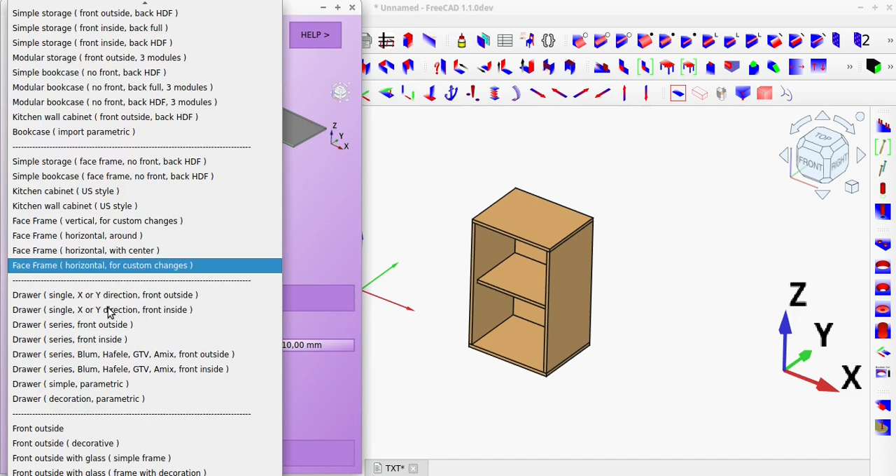Foot can be created via the magicStart tool. To create a foot under an existing piece of furniture, select the bottom surface of the furniture and then press the button to calculate the foot position and size. You can then press the button to create the foot under the furniture.

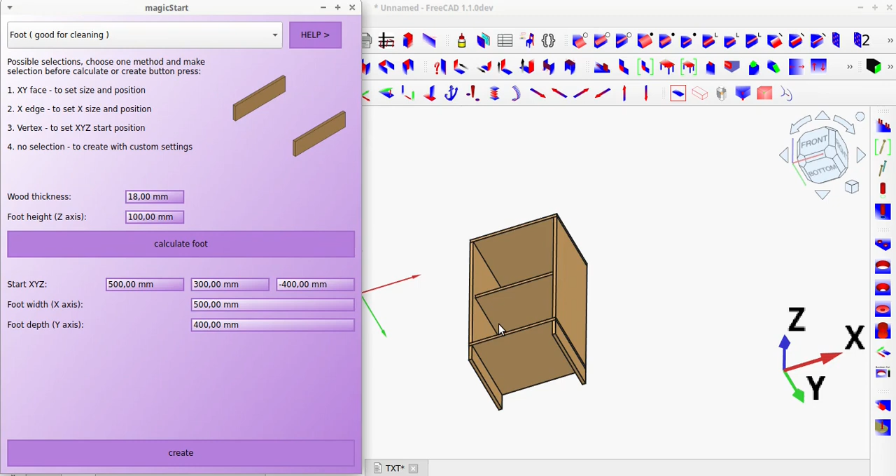You can also create a foot under the furniture by selecting only an edge or vertex, but in these cases, you have to manually fill in the remaining dimensions needed to create the foot. The magicStart tool offers several different foot versions. These versions are designed to be used to create solutions commonly used by carpenters.

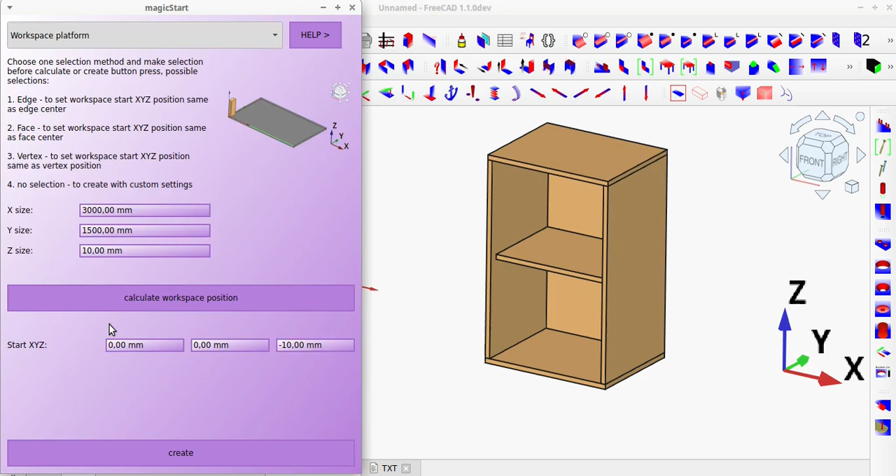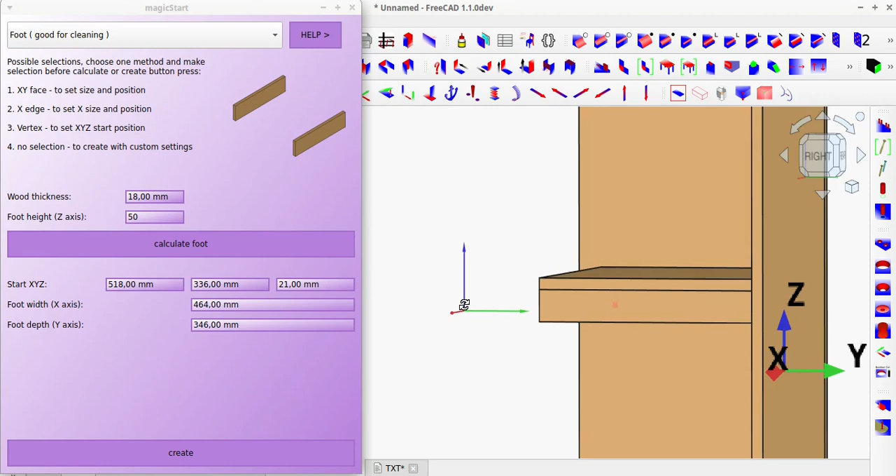The foot can also be used in other, more unconventional ways. For example, you can create supports under the shelf. If you don't want to weaken the side walls of the furniture and create grooves for the shelves, or you don't have a table saw or router to create such grooves, but you want a heavy-duty shelf, this solution may

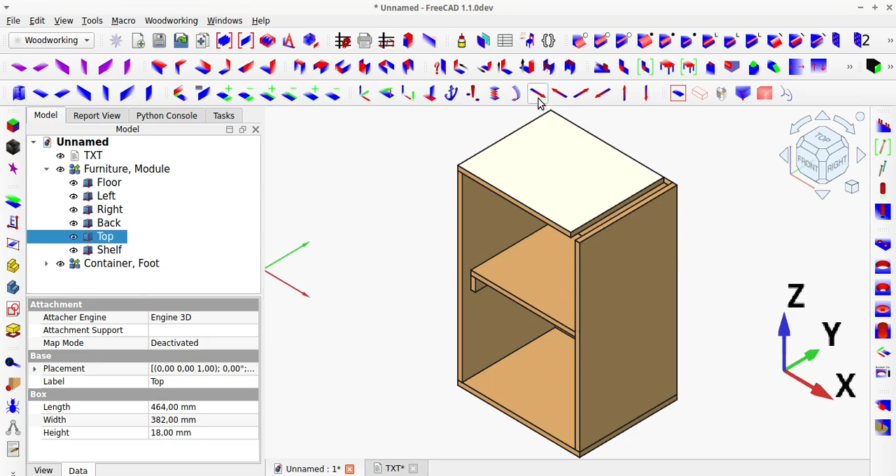be helpful. Aluminum angle brackets can also be used to make the shelf stronger, but you must buy them first, and the shelf will be permanently attached. With such supports, you can use scrap, and the shelves can be removed and are much stronger than those supported only by standard shelf pins.

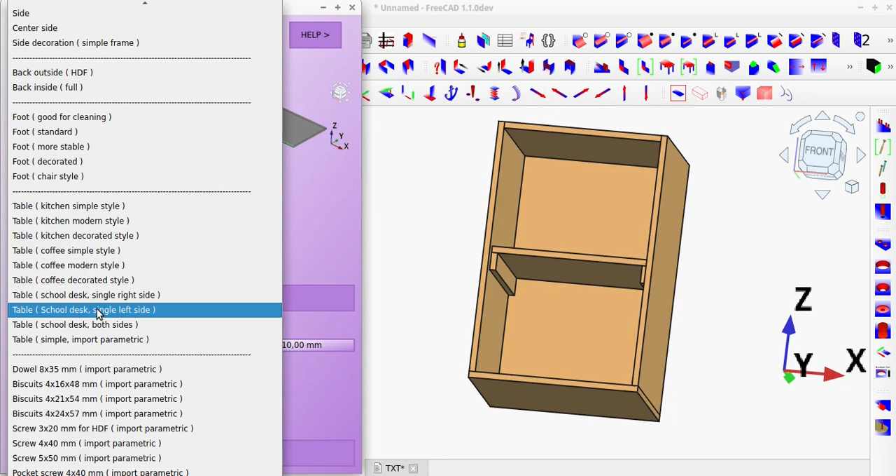Another example could be using a foot to strengthen and stabilize the top of the furniture, or to create exterior decoration. However, remember to completely resize the top cover to keep it between the furniture sides to ensure the foot size will be correctly calculated.

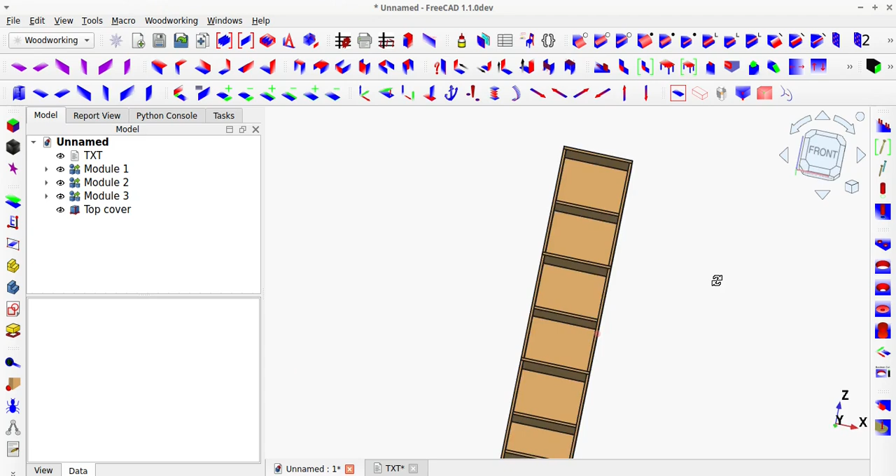To the magicStart tool have been added 2 new versions of bookcases. Each version is created from 3 modules. The first version of the modular bookcase has a back made of a solid board, making it more heavy-duty and stable, and it is highly recommended for heavy loads. The entire bookcase is constructed from simple panels, so a cut list for this construction is available at once.

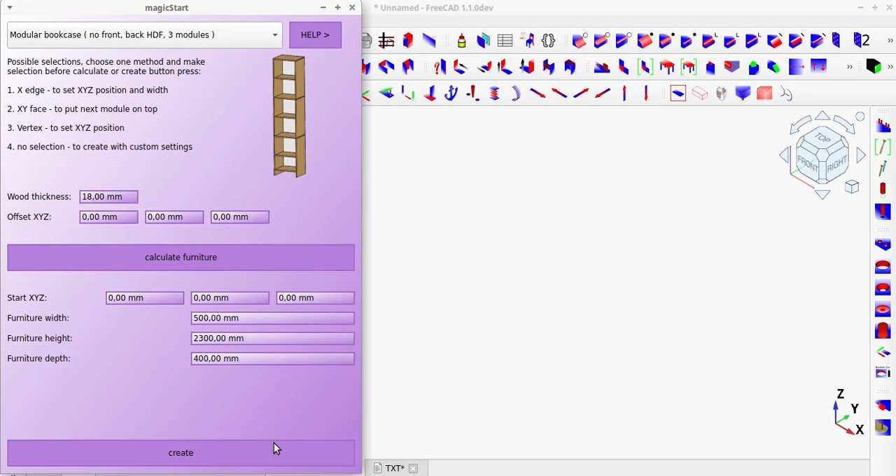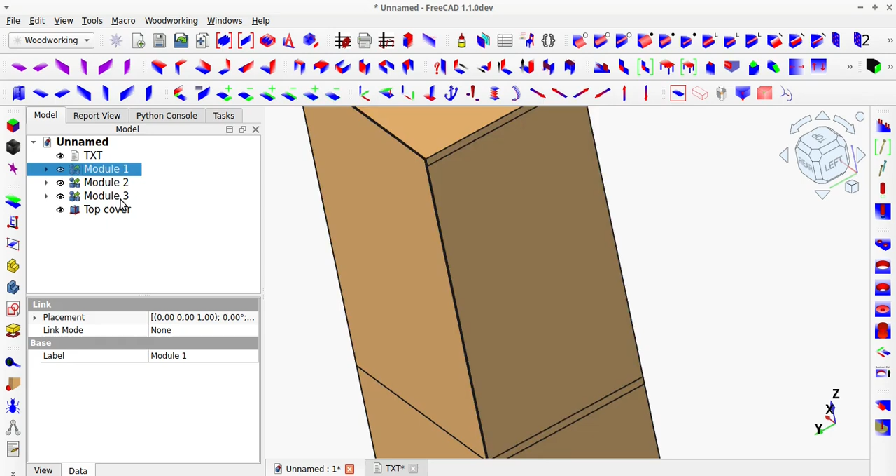The second version of the bookcase has a back made of HDF, 3mm high-density fiberboard. The back boards are applied to the top of the bookcase, giving them the same dimensions, allowing the two upper modules to be produced in the same way. A cut list is also available for this version. Both versions can be created with any size, allowing for more complex structures.

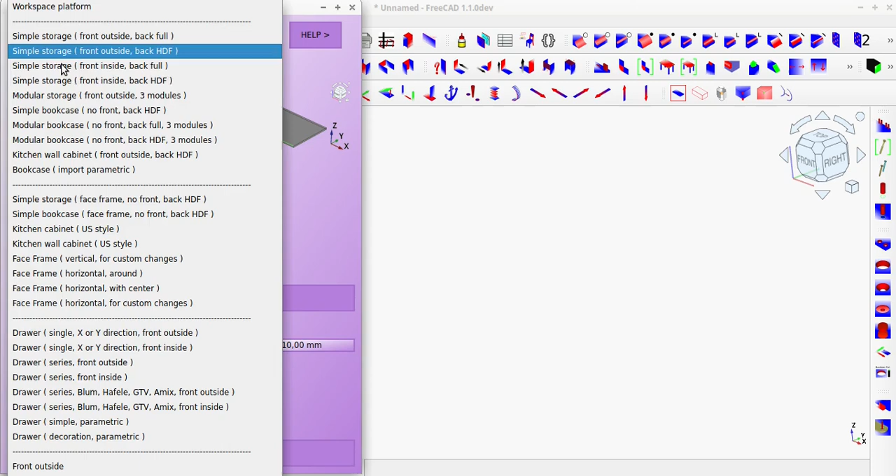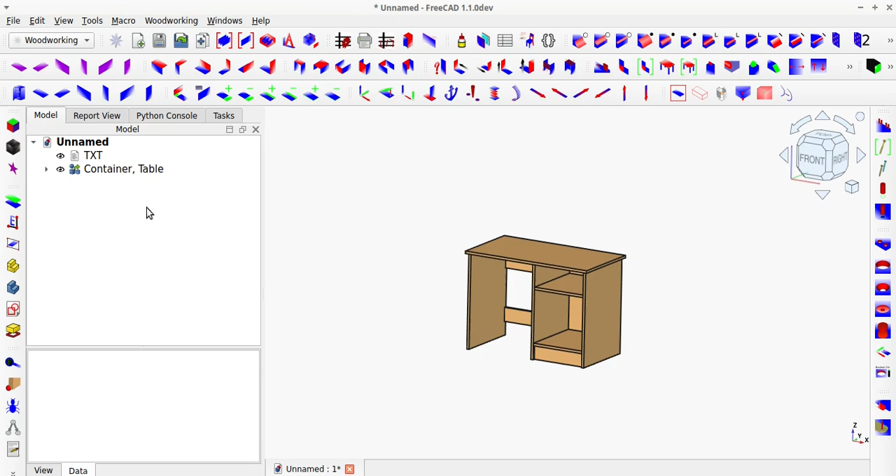To the magicStart tool have also been added 3 new versions of children's school desks. The first version of the school desk has a cabinet with free space on the right side and is designed in a way typical of this type of desk for children. The free space can easily be filled with drawers or a closed front.

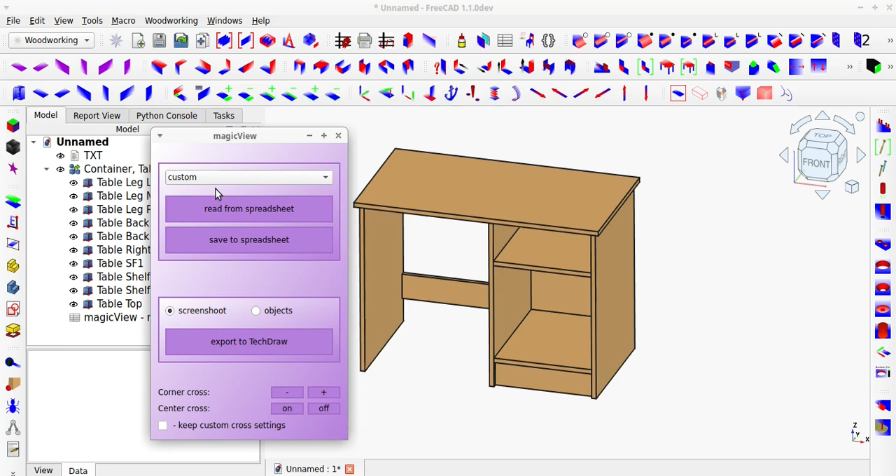Because the desk is made of simple panels, various viewing options and a custom cut list are immediately available.

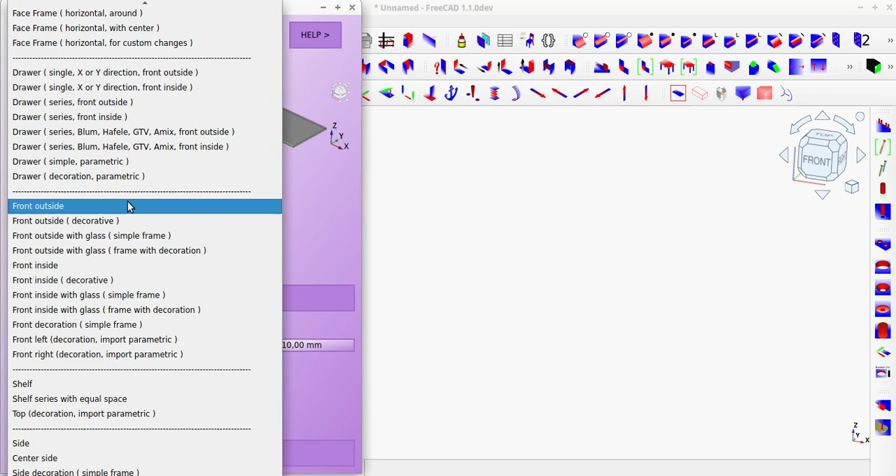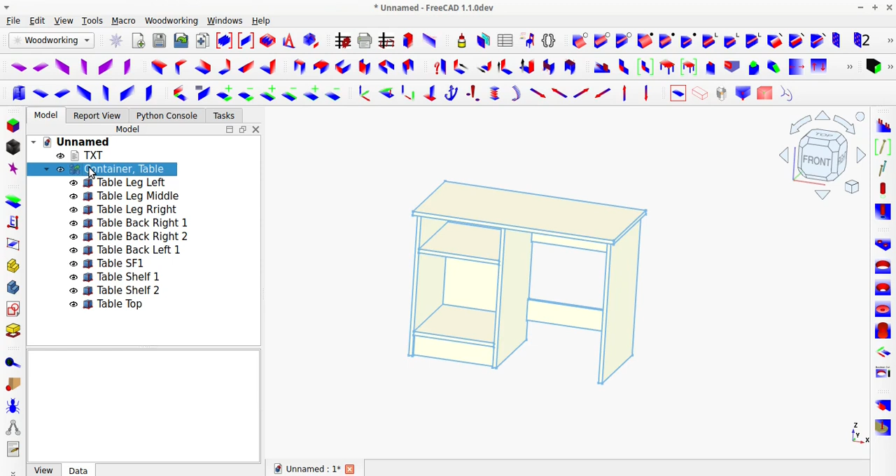The second version of the children's desk has the same design as the first one, with the difference that the storage cabinet is located on the left side, which may be more comfortable for left-handed children. Of course, in this case, the structure is also made of simple panels, so the cut list is immediately available.

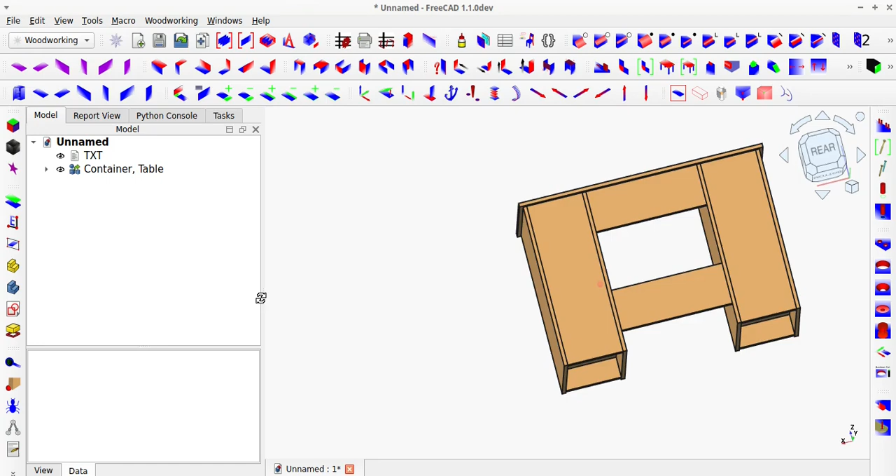The third version is slightly larger by default and includes spaces for storage on both sides. Of course, all three versions can be created in any size or freely modified using the available tools.

Now I'll show you how quickly you can create a typical children's desk with drawers. First, I'll select the appropriate desk type and provide the desired dimensions. Then,

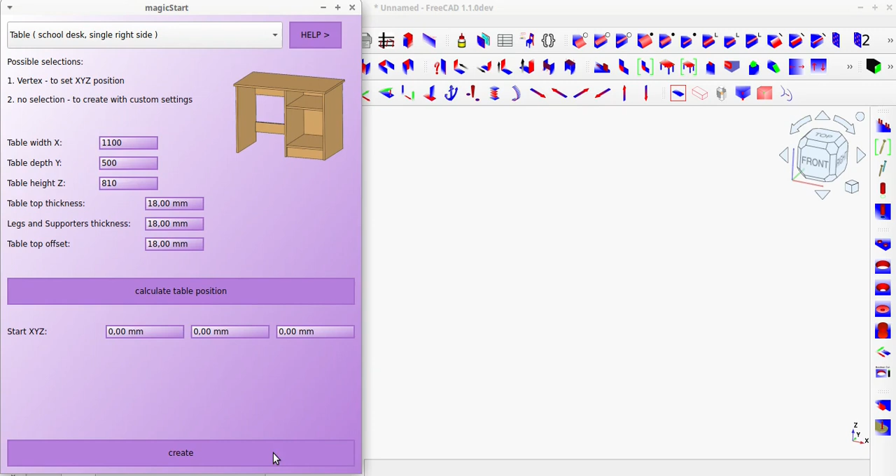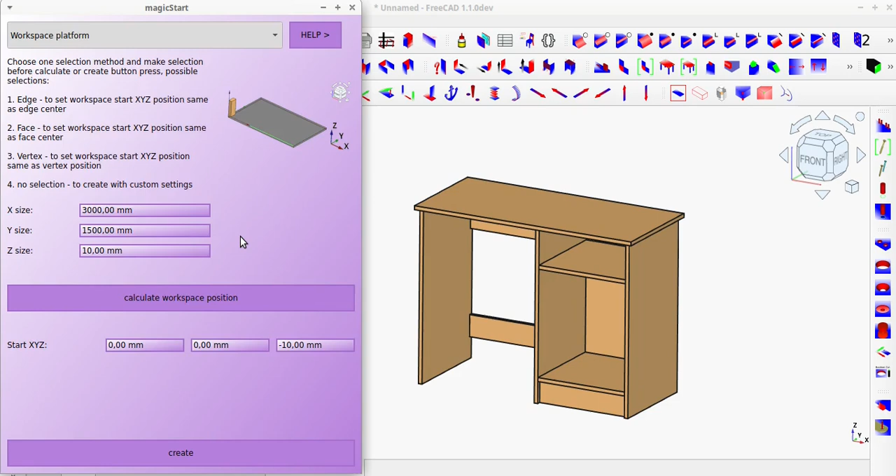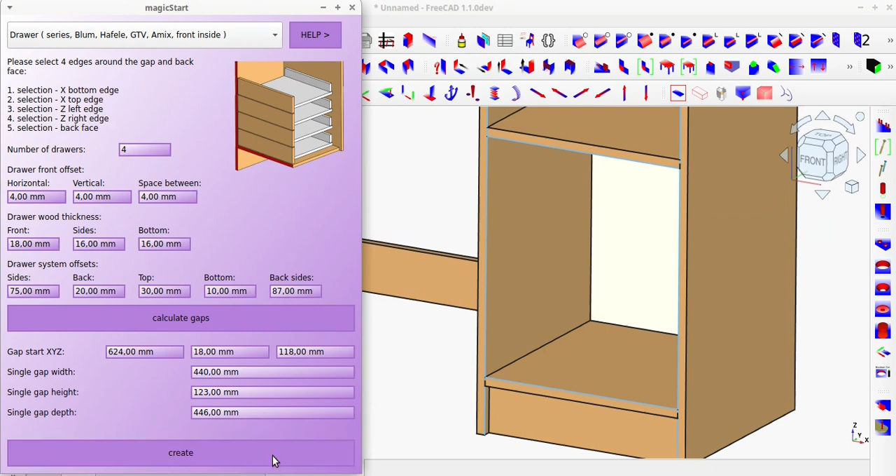I'll fill the empty space with 4 drawers with fronts inside and drawers based on pre-made drawers available on the carpentry market. To create 4 drawers, select the edges around the empty space and then the back face to determine the drawer depth. While selecting multiple edges, hold down the left control button on your keyboard. If you make a mistake while selecting, click again to clear the selection.

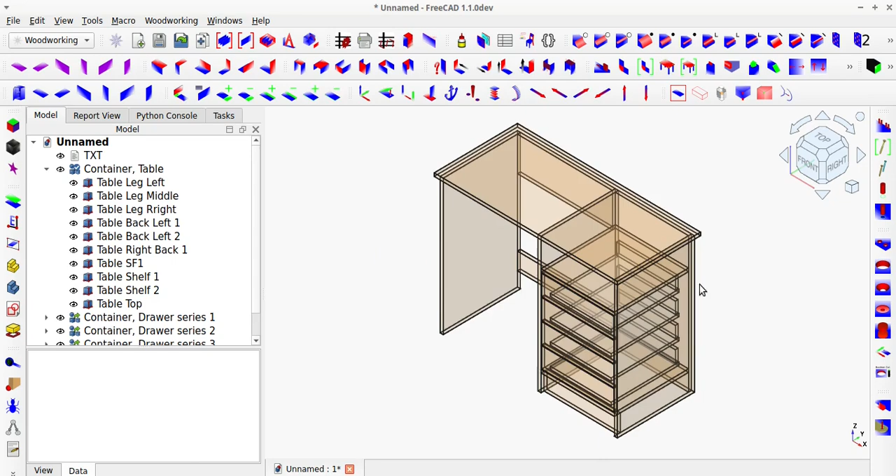Now I'll show you how quickly you can create a soft close drawer animation. Taking advantage of the fact that each drawer is created in a separate container, simply open the Magic Move tool and select the animation option. The elements to be moved in this case are the drawer containers.

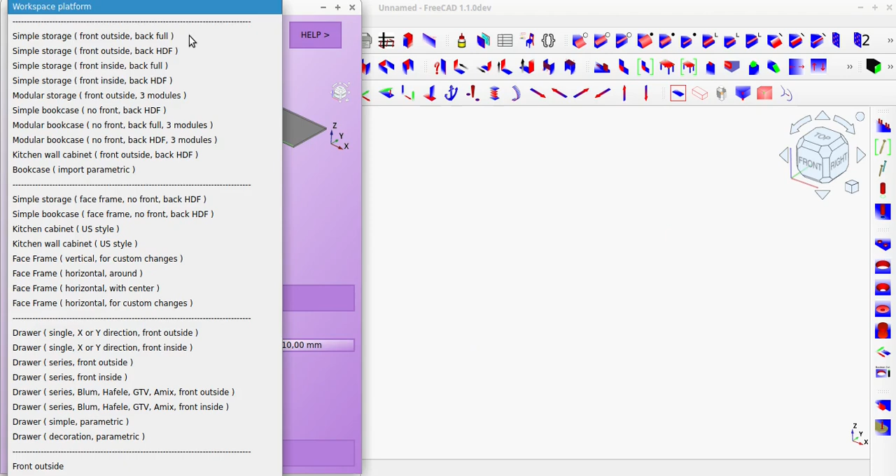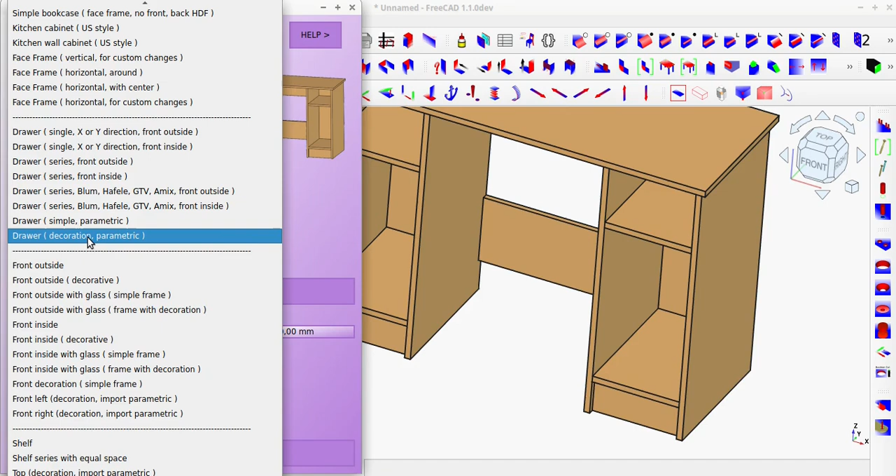Now I'll show you how to use the version with empty space on both sides. First, I will create 5 drawers with fronts outside. In this case, it's a good idea to keep the top of the table extended by at least the thickness of the board so that the drawer fronts don't extend beyond the entire furniture.

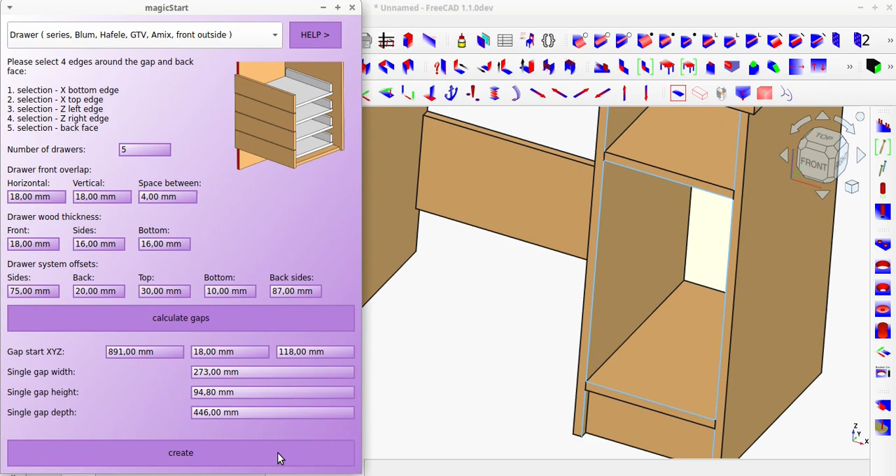In this case, selecting the edges is the same. However, you should select a different drawer type if you want the fronts to be on the outside. Then, simply add the part with the closing front on the left side in a similar manner.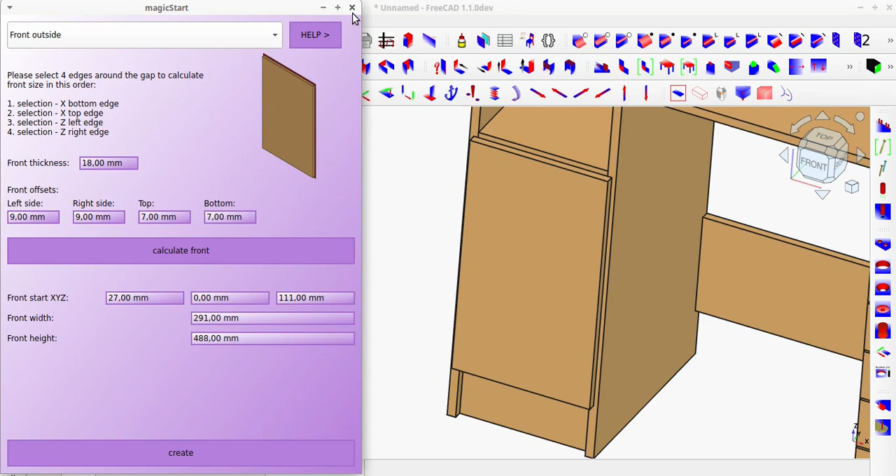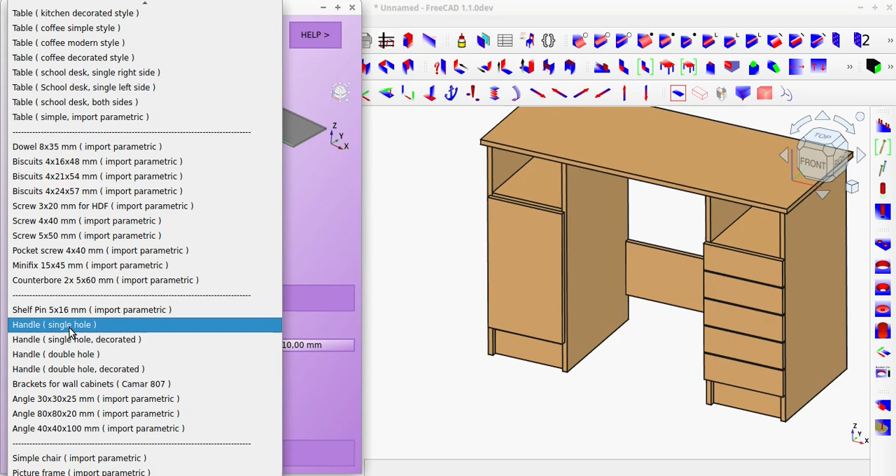Now I'll show you how to add sample handles to the fronts using only the magicFixture tool. However, it's important to remember that the objects you want to add this way should be created at the 0 point of the XYZ coordinate axis to avoid unnecessary offsetting. In this case,

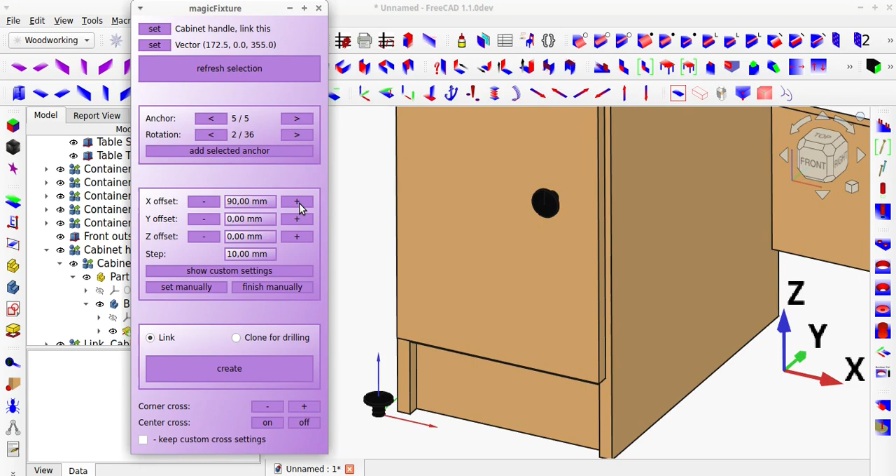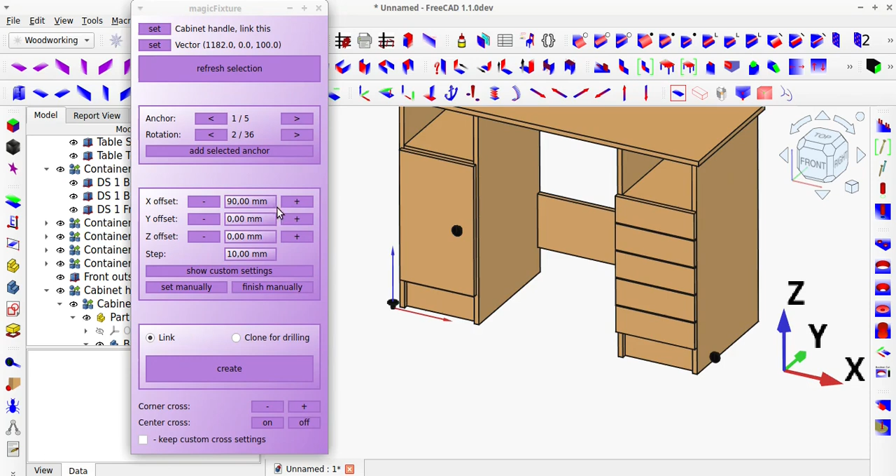the handle won't require further modification, so you can choose the linking option. For drawer fronts, it's best to reference the center of the surface.